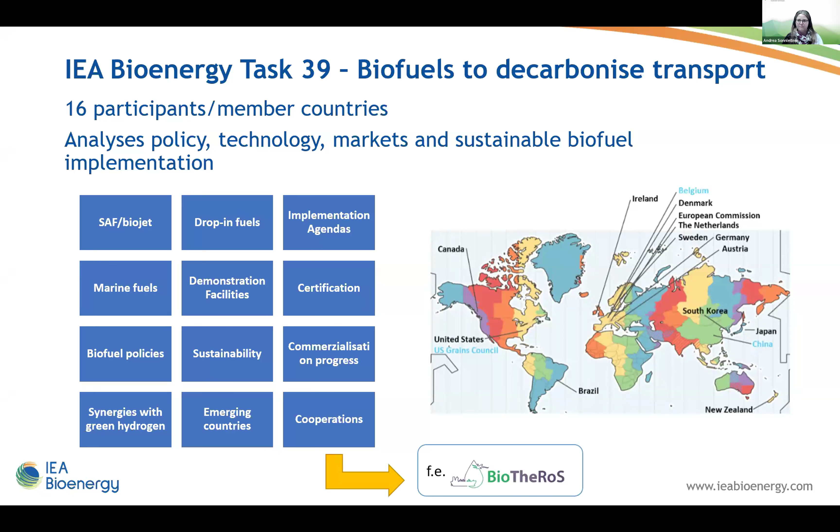At this point, I'd also like to invite you to have a look at the Task 39 webpage, where the recently published reports of the task are available. There are reports on sustainable aviation fuels, on drop-in fuels and co-processing, on biofuels in emerging markets, and also the implementation agendas report on biofuel policies.

So what technologies are we looking at in our task? There are many ways to produce liquid and gaseous biofuels from biomass, either from dedicated crops or from residues and wastes. Here you have a graph from IEA Bioenergy where you can see the different technology pathways and also where they are at in technology readiness.

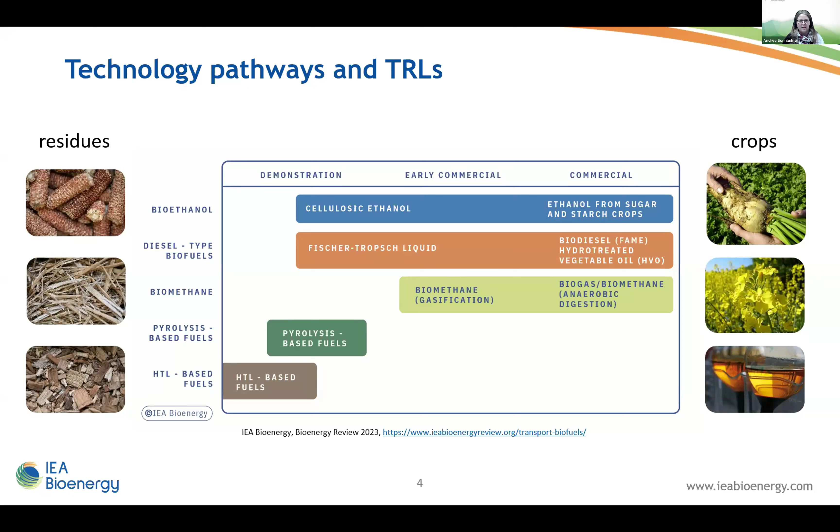So commercial applications are ethanol from sugar and starch crops, biodiesel and hydrotreated vegetable oil, also biogas and biomethane from anaerobic digestion. Biomethane from gasification is already in an early commercial phase. Then we have some technologies which are in the demonstration phase, like cellulosic ethanol production, Fischer-Tropsch liquids, pyrolysis-based fuels, and hydrothermal liquefaction-based fuels.

We in Task 39 are mainly focusing on advanced biofuels, and there we assess and track the development of advanced biofuels demonstration facilities. So we have this database on facilities for the production of advanced liquid and gaseous biofuels for transport, and we are tracking this development since 2009.

We have seen a lot of developments in recent years. Within this database and map you have the possibility to search and filter for different facilities and technologies. So we have listed alcohol to jet as a technology, e-fuel biomass hybrids, fast pyrolysis, fermentation, gasification, hydrothermal liquefaction, hydrotreatment, lignin depolymerization, and others.

There is also the possibility to filter on the status of the facility - is it a planned or announced facility, is it already under construction or even operational. And you can also filter by raw materials or the output of the facility.

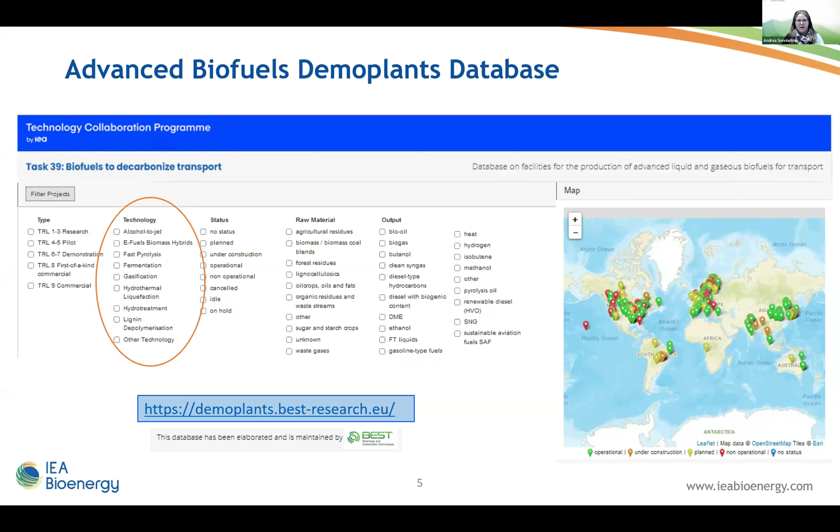From this database and the entries we have there, I want to show you two examples of such demonstration facilities. Those are from thermochemical technology routes, and afterwards Patrick Reumermann will tell you more about the pyrolysis technology, and Theresa Köfler will tell you more about the gasification. One of the examples I brought with me is the Pyrocell plant in Sweden.

This facility uses the BTG-BTL pyrolysis technology, and the upgrading is then done in an existing refinery. The other example is the syngas platform in Vienna, which is a biomass gasification plant with Fischer-Tropsch synthesis. But as I said, my colleagues will tell you more afterwards.

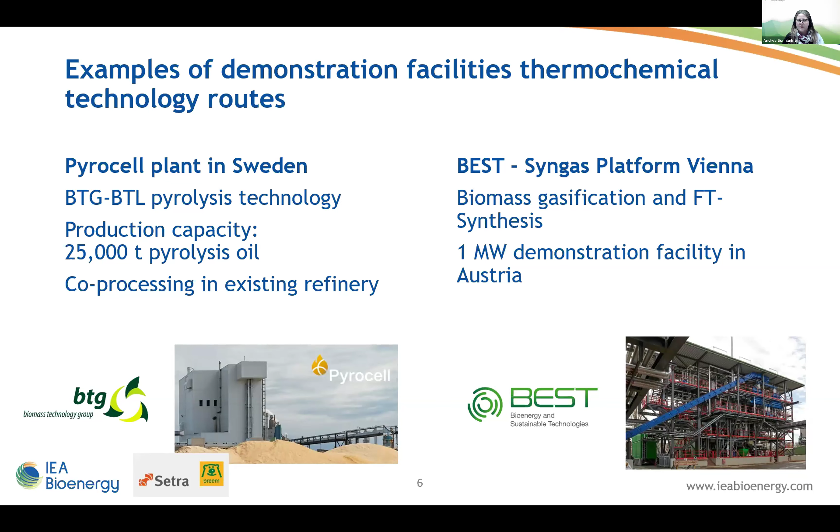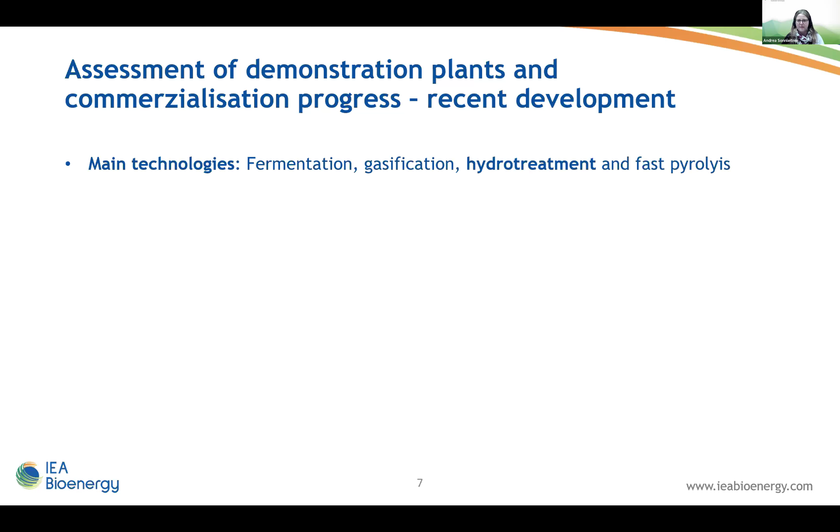Now I want to give you some insights on recent developments we have seen within assessing the demonstration plants and the commercialization progress. So the main technologies listed in our database are fermentation, gasification, hydrotreatment, and fast pyrolysis, whereas the hydrotreatment is already commercially available. We've seen in the last years a rising number of facilities and also a rising number of planned facilities.

There were many announcements in recent years, also for the production of sustainable aviation fuels. Then we also see a diversification of technologies and the combination of different technologies - as I said before, we have some listed which are e-fuel biomass hybrid systems. There are also more and more co-processing facilities, and we see an increase in retrofitting oil refineries.

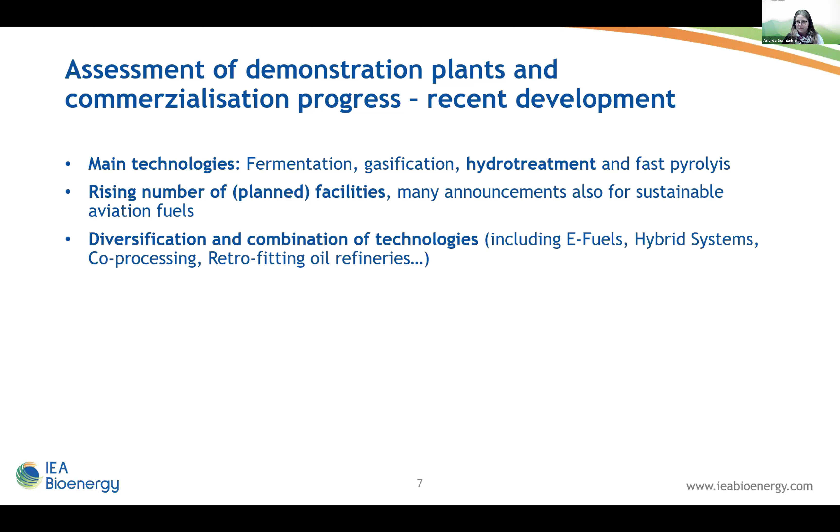We saw also that more and more waste streams are used, and also waste streams from non-biological origin, or recycled carbon fuels, like for example flue gases as feedstock for fermentation. And with our global view, we also saw the increasing development in emerging countries and in Asia.

But what we also see is that commercialization takes time. There is slow progress for some technologies and also many setbacks in the commercialization process. So there are cancelled projects or announcements which are not leading to facilities.

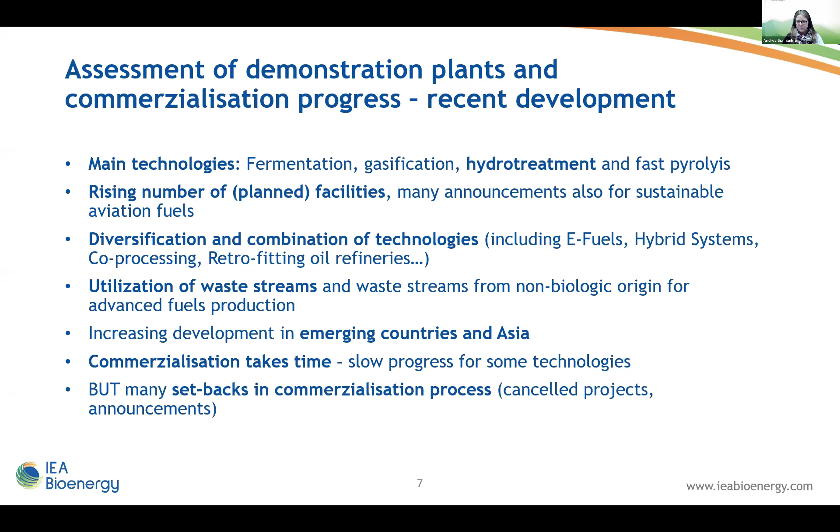As I said, there is now a focus on sustainable aviation fuels production. So there are many plants with SAF capacity or planned SAF capacity, and many announcements for facilities producing sustainable aviation fuels.

And in the existing facilities, the SAF fraction can be increased. So at the moment, the main technology is the hydrotreatment technology, and there SAF is only one of the possible products. The fraction which is produced the most is depending on economics and policies. But there is potential that in those facilities, the SAF fraction can be increased.

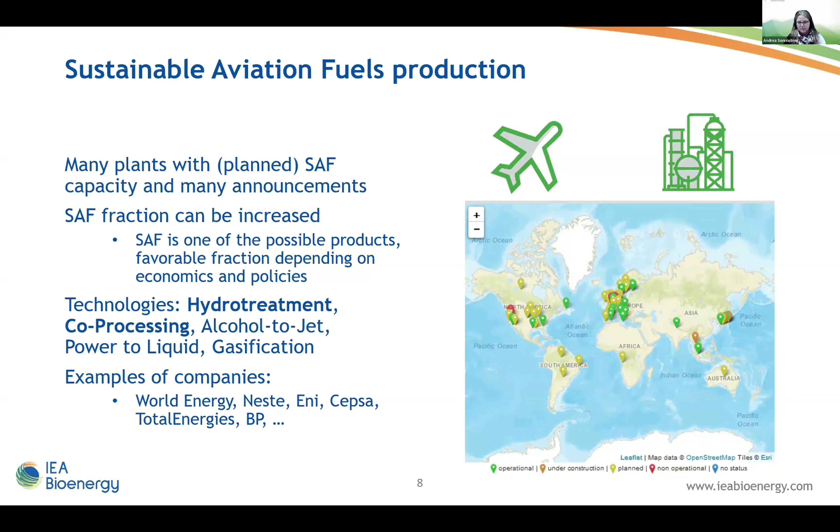But why is it so important to demonstrate technologies and to scale up the facilities? The demonstration validates the feasibility and efficiency. Within real world settings, the effectiveness can be confirmed, and crucial performance data can be provided.

It's also important to have a variety of feedstock, so the demonstration of different technologies is important, to use different feedstocks and waste streams, and to see in real world settings how the feedstock supply chain can work. The scale up reduces production costs through economies of scale.

We see that reaching commercialization is critical, but it takes time from the announcement of a plant facility up to operation. And there is the risk of scaling up too fast, which can lead to failures and setbacks for the technology.

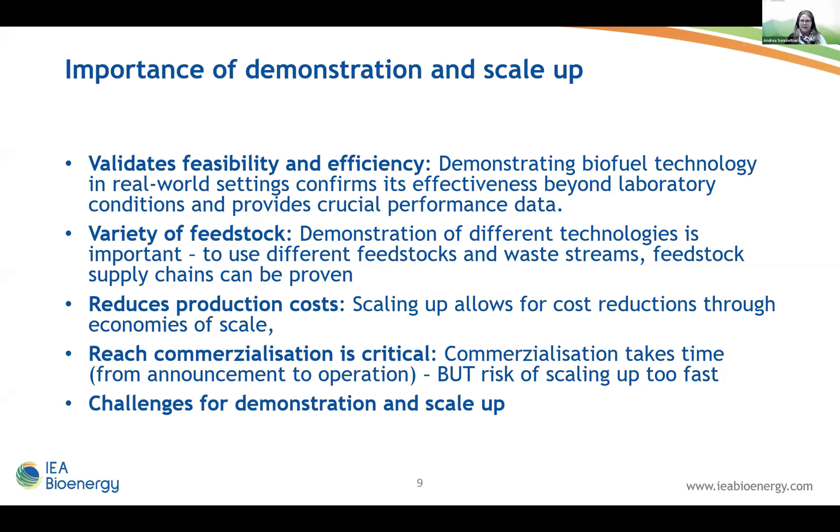There are also challenges for demonstration and scale up, which I'll give you on the next slide. Here are listed implementation barriers for the production of advanced biofuels: economic implementation barriers, like the high production costs of advanced biofuels, the financial risks of demonstration, and first of its kind facilities. Then we have uncertainty of regulatory framework and policies.

Another important barrier is the availability of feedstock and the sustainability of feedstock. In some countries, policy is focusing on options other than liquid biofuels.

But we also see a lot of opportunities for liquid biofuels. The technologies are based on a broad variety of biomass feedstocks, which leads to diversification of energy supply. Biomass production provides regional income, and we can use biofuels in current vehicles and existing infrastructure, so we have immediate greenhouse gas emission reductions.

The high energy density of liquid biofuels is an important alternative solution for the hard to electrify sectors in transport. So instead of using liquid biofuels in passenger cars, it's a good opportunity for trucks, ships, and planes.

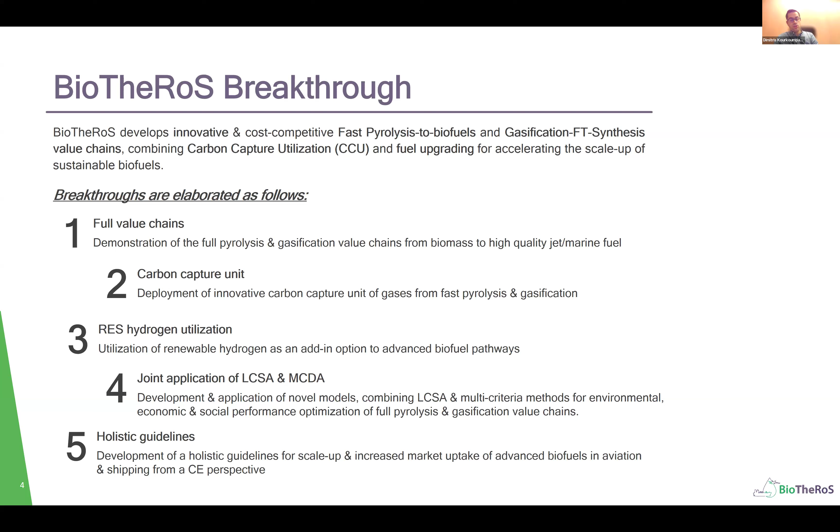Please let me describe in brief, since my colleagues later, Patrick from BTG and Teresa from BEST, will describe in more detail their facilities that are involved in BioTheRoS Project. So just a brief description here.

BTG operates a lab, a pyrolysis bench scale unit with capacity from 2 to 5 kilos per hour, and a larger scale pilot plant from 80 to 200 kilos per hour.

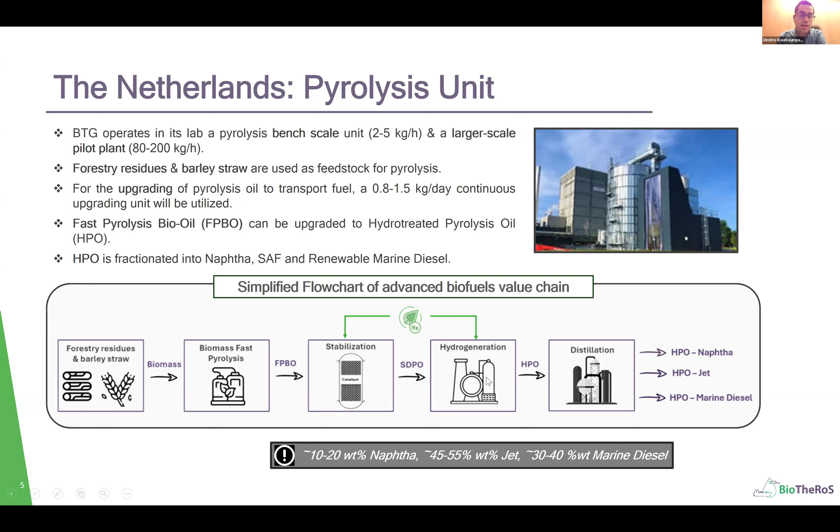In BioTheRoS Project, we will investigate through this pathway two feedstocks: forestry residues and barley straw. So as you can see in the figure, starting from this biomass and through fast pyrolysis, we produce fast pyrolysis bio-oil, and then by upgrading through hydrogenation, we produce HPO that is fractionated into naphtha, SAF, and renewable marine diesel. This is the first pathway.

The second pathway is under the supervision of BEST colleagues. Here BEST operates a plant about 1 megawatt scale, a reactor with capacity 200 kilos per hour, and a 250 kilowatt pilot Fischer Tropsch synthesis unit.

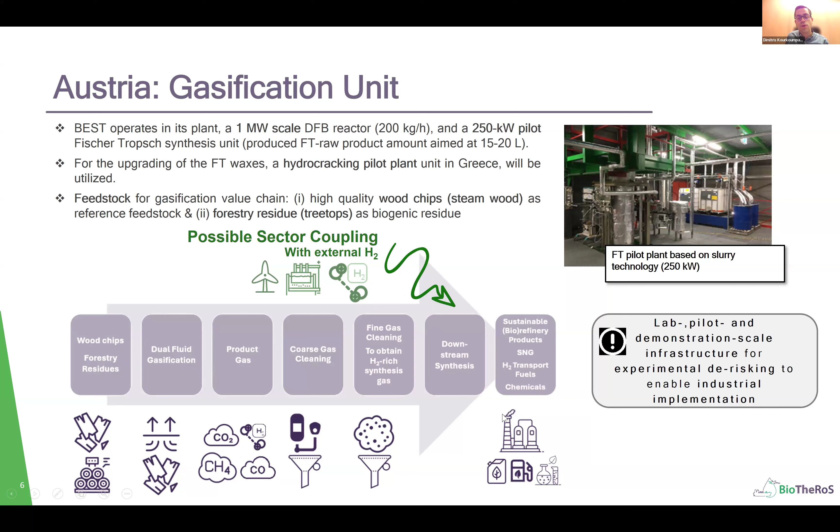Now our methodology, which are the activities, how we address these technologies and what we do in BioTheRoS Project. First of all, we investigate the biomass supply, the biomass potential, the whole logistics about the treatment that may be required.

Then we do lab scale activities first, and then pilot scale activities in the facilities that I described before, in order to produce a plethora, a number of final biofuels to be used either in the aviation sector or in the maritime sector.

For these activities, of course, we support and do modeling, for example process modeling, in order to evaluate the scale-up scenarios, so to identify the most critical parameters and to try to optimize one of the scale-up scenarios.

We do, of course, experiments, LCA analysis for the environmental assessment of all these activities, and finally analysis regarding market dynamics and business modeling in order to find opportunities in the market for those fuels. Of course, we are in contact with stakeholders and collaboration with other projects in order to be in line and synchronize our activities.

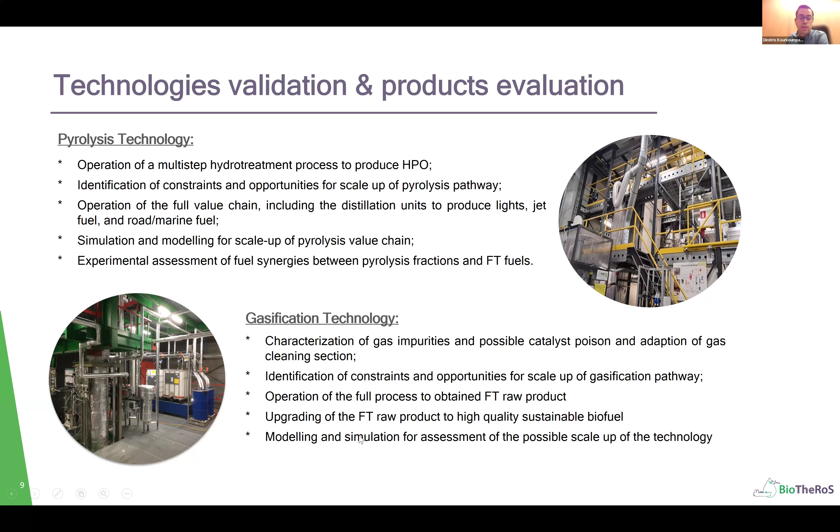To upgrade this into high quality sustainable biofuel, and finally modeling simulation of the assessment of the possible scale-up technology.

This one is the framework, the description about the life cycle analysis. So we will develop a specific framework for the whole value chain under life cycle thinking using ISO standards. The same work for the life cycle costing, the life cycle thinking in terms of cost, and for the social analysis, the same in the social dimension.

So we'll combine all of these pillars under one using multi-criteria analysis in order to present the most sustainable pathway for the stakeholders. Of course, we will do also techno-economic assessment of CCUs and renewable hydrogen as add-in options to advance biofuel pathways.

The impacts regarding the BioTheRoS project is first of all to optimize the process from biomass to biofuel. So we see which are the points that need to be improved in these value chains in order to go for the scale up.

Of course, based on the work that we are going to do, we build knowledge for upscaling, the biofuels efficiency enhancement, so to overcome technical bottlenecks, and of course integration of CCU and renewable hydrogen will improve the efficiency of those technologies.

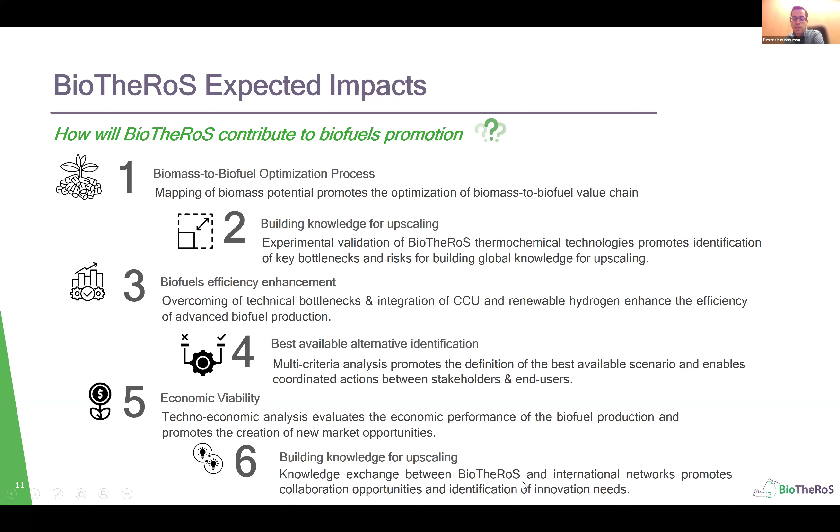The economic viability is another impact that we are also going to have at the end of this project, so to provide a techno-economic analysis in order to evaluate the economic performance of those technologies. And of course, as I mentioned in the beginning, not only with technology providers and other partners that are working on that, but also with international networks and other projects.

Synergies that we have are, of course, with government and regulatory bodies and research stakeholders in order to provide this guideline that we are going to develop, as well as with fuel producers and suppliers, airlines and shipping companies. So as you can see, we are looking for synergies with all stakeholders in the whole value chain.

And of course, very critical is also the biomass providers, because biomass potential is the first aspect that we investigate and have to take into consideration. And of course, the social acceptance of our work is always an issue, and we like also to have synergies and to provide our own contribution to the citizen.

Some take-home messages. First of all, the sustainable supply of quality, cost-effective feedstocks to future biorefineries is fundamental to growing the bioenergy industry. Managing biomass supply chain risk is a critical part to favor long-term sustainability of advanced biofuels in terms of adequate fuel supply.

The deployment of a holistic, circular economy driven guideline for the full supply chain of advanced biofuels is needed, both for aviation and maritime markets. So constraints and opportunities for scale up will be highlighted and will be provided through the project.

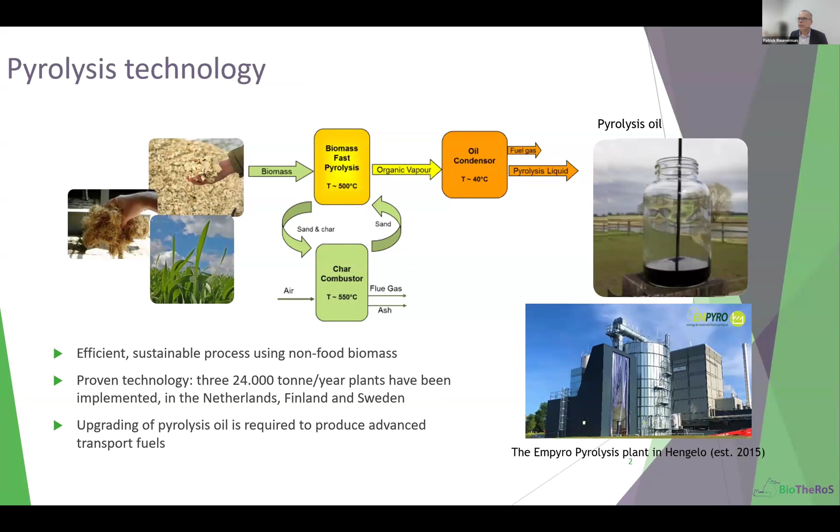To use it as an advanced transport fuel, you have to upgrade it. This upgrading, the value chain which we see for that, is that we have decentralized fast pyrolysis plants, which are located close to the biomass. This is because transporting biomass is expensive, since it is bulky, and sometimes the moisture content is also a bit higher, which means you are transporting a big part of water and air.

So close to the biomass, we have one or more pyrolysis plants. They take in around 40,000 tons dry biomass on a dry basis. Several of those feed into a centralized upgrading unit. This upgrading unit takes in the pyrolysis oil, which we term fast pyrolysis bio-oil, or FPBO, and then we upgrade it towards HPO, hydro-treated pyrolysis oil. We expect that the minimum size for this centralized upgrading would be around 3 pyrolysis plants, so 70,000 tons per year as input. The typical size would be about 10 pyrolysis plants, so 240,000 tons per year of pyrolysis oil.

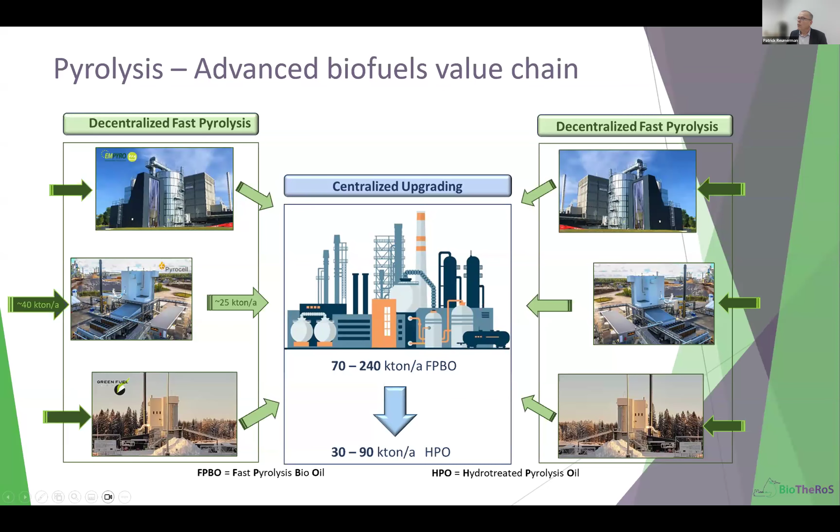Good, well then, now we have the second technology, the upgrading. To give an idea about what the issue is, what the challenge is, we have here a comparison of the fast pyrolysis bio-oil to the left and the drop-in biofuels to the right.

If you look at the picture, you already see it. The pyrolysis oil is opaque, and its viscosity is a bit higher than, for example, the aviation fuel, which is nicely transparent and low viscosity, and the distillate marine fuel, which is also low viscosity and transparent.

The difference becomes even more apparent when you look at the properties. Fast pyrolysis bio-oil can be described as a liquid biomass, and there is still water in it - 1/5 to 1/4 of the mass is water. In drop-in biofuels, we have hardly any water. The density is 1.2 kilogram per liter, that's below 1 for the aviation fuel and for the marine fuel.

A big difference is the heating value. This is 16 megajoule per kilogram for the fast pyrolysis bio-oil, which is comparable to biomass, and it's about 42, 43 megajoule per kilogram for these drop-in biofuels.

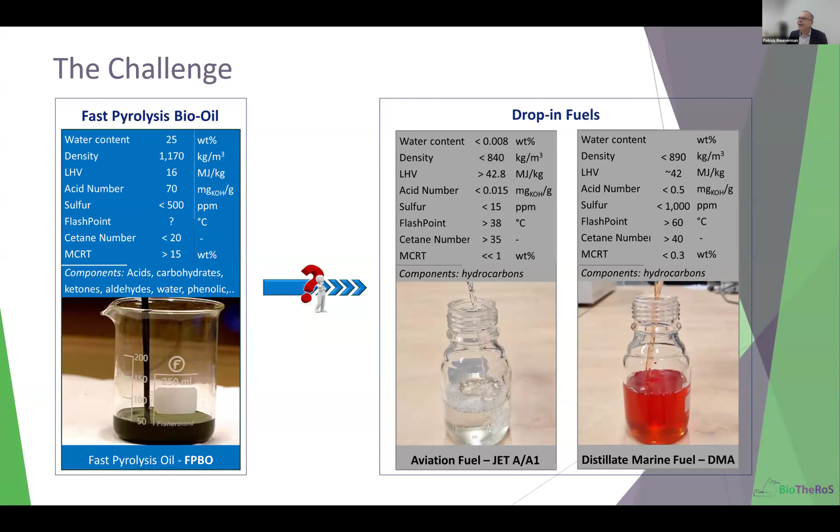Well, how do we change that? Because we have to if we want to make advanced biofuels. We upgrade this biofuel in 2 steps. First, we stabilize the fast pyrolysis oil.

We do that with a dedicated Picula catalyst, a proprietary catalyst. We use quite high pressures for these types of processes, reasonably medium temperature ranges, and we can stabilize this oil so that it becomes less reactive, and we get a new product, stabilized pyrolysis oil. This is a liquid which is far more similar to petrochemical products, so it can be used, for example, as co-feeding in a fluid catalytic cracker of a refinery, or it can be used to produce chemicals directly.

But we want the transport fuels, so we do a second step. We hydrotreat this SPO. For that we can use a standard catalyst, NiMo, CoMo - nickel molybdenum, cobalt molybdenum. For these types of processes, normal pressures and temperature ranges, and we get our product, the hydrotreated pyrolysis oil. This is kind of a more generic name for a generic transport fuel.

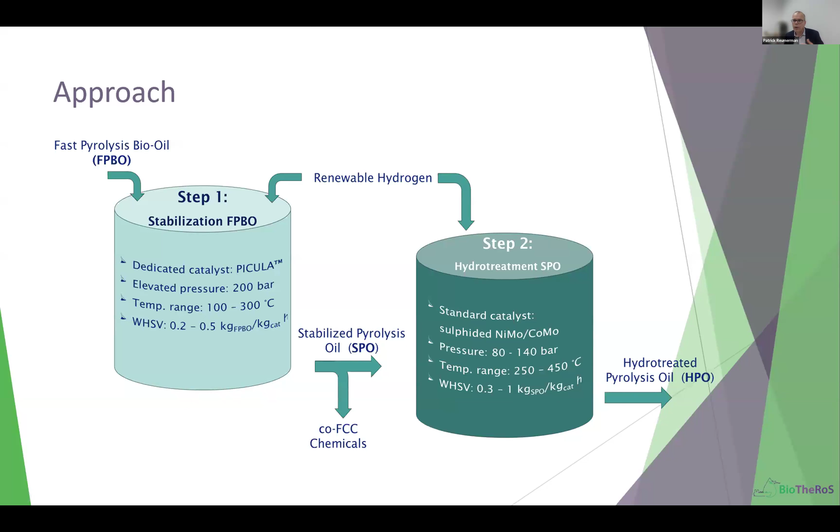If you take this approach and transform that into how a process would look like, we get this picture. This 2-step process is divided into 3 steps. In the first step, and you see this is a fixed bed, we use our Picula catalyst to stabilize the pyrolysis oil. We get as the product the SPO, the stabilized fast pyrolysis oil.

After that, we remove the oxygen in the form of water. We do that with a hydrotreatment catalyst, and we get an intermediate product which is stabilized deoxygenated pyrolysis oil, which then needs to be hydrogenated, so hydrogen needs to be added, so that we get our hydrocarbons, the hydrotreated pyrolysis oil.

This pyrolysis oil can then be distilled via a typical simple distillation process, and we get 3 products. The first, the lights, those are the HPO naphtha fraction, around 10 to 20%. Then in the medium range, C8 to C18, we have the jet fuel range, that's about 45 to 55% of the HPO.

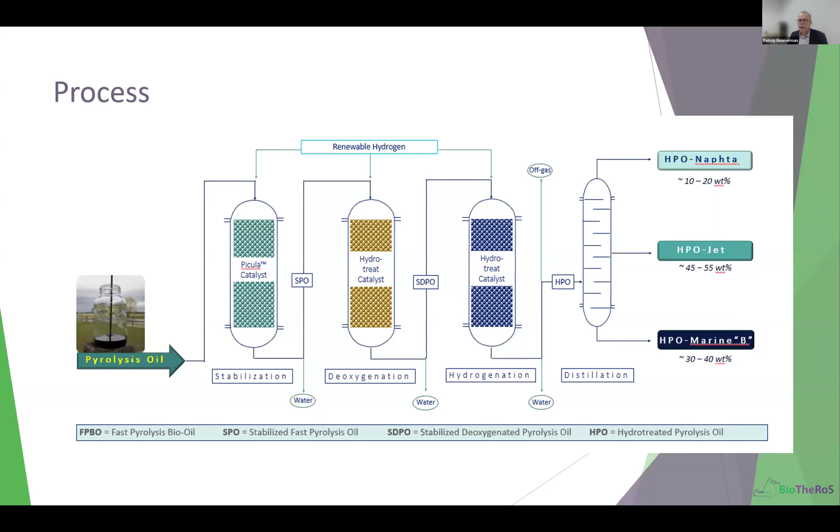Well, how does that look in practice? Actually a bit like you would expect. Here we have some laboratory examples of what we did in our laboratory, in our bench scale and pilot units. We have done this with several types of biomass, with both hardwoods and softwoods.

Here you see on the left the fast pyrolysis bio-oil - it is viscous, it is opaque. The SPO is still opaque, by the way, but it looks a little bit better. And then you see HPO, which can be converted, distilled into naphtha, the biojet, and the biodiesel. Of course, these are fully transparent. This one is a little bit less transparent. This is how it looks.

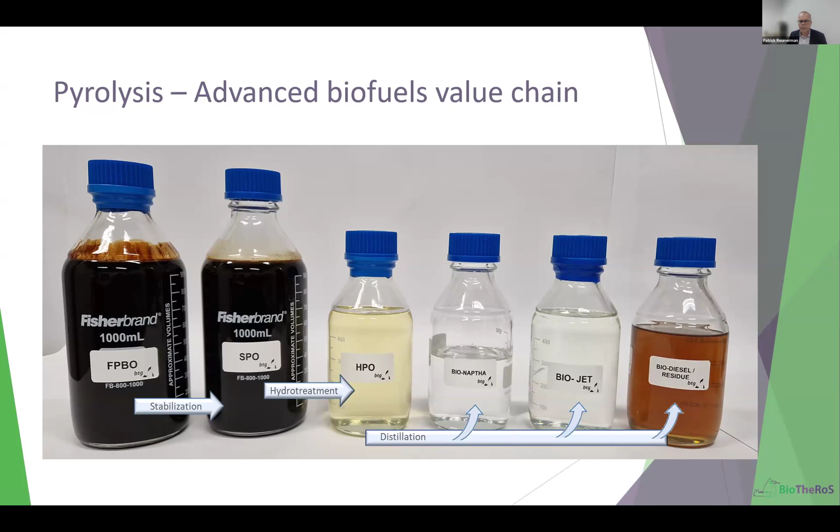Another way to see how it looks is this table. I'll walk you through it. These show the fuel properties of the various intermediate and final products of the upgrading process. We see here the column of the fast pyrolysis bio-oil, and at the end, the column of the hydrotreated pyrolysis oil. What you see is quite encouraging.

Our water content, from about one-fifth to one-quarter of the mass, has decreased to almost nothing. Our density has decreased to around 0.85. Our viscosity has decreased, which is quite nice. And very important, our carbon residue is reduced to almost nothing.

How does that happen? One way to look at it is via the elemental balance. We see that oxygen is reduced from about 50%, which is very typical of normal biomass, to almost nothing. Looking at the ratios, the H/C ratio here is 1.3 to 1.5, and with the HPO it is very near the typical petrochemical range. For the oxygen over carbon ratio, we see it has gone to almost nothing. So this HPO looks quite a bit like these transport fuels.

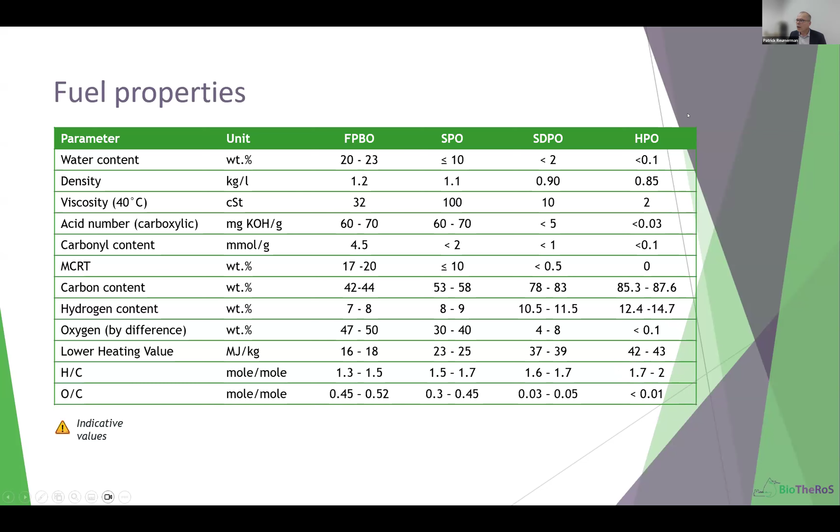There was a question already in the chat about how flexible we are with these products. Well, they are the result of a distillation process, so if you change the temperature range, you are in a sense relatively flexible. In practice you will not be, because especially the HPO jet has quite a strict specification.

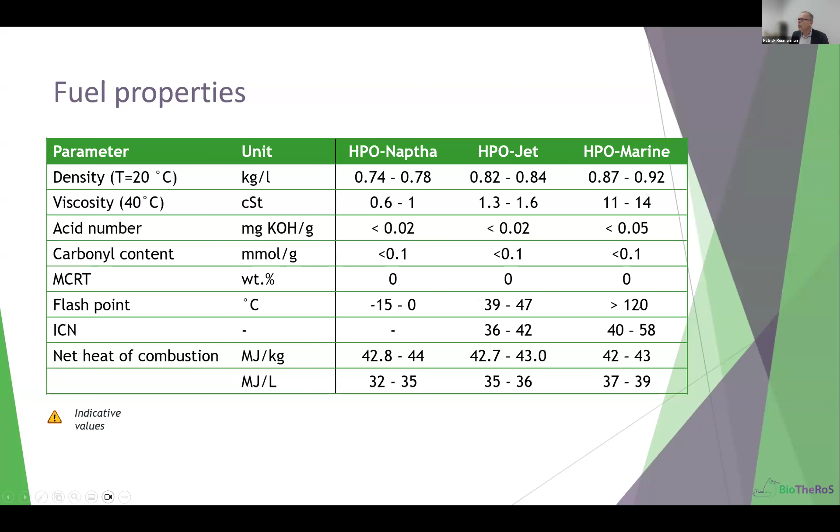So in summary, we can upgrade the fast pyrolysis bio-oil to hydrotreated pyrolysis oil, and we can fractionate that into naphtha, biojet or sustainable aviation fuel, and renewable marine diesel. In the BioTheRoS project, we want to demonstrate the value chain using forestry residues and barley straw, another lignocellulosic feedstock, as the two feedstocks for the pyrolysis upgrading process.

Here you see again the project's three products with their specific fractions when you distill the HPO.

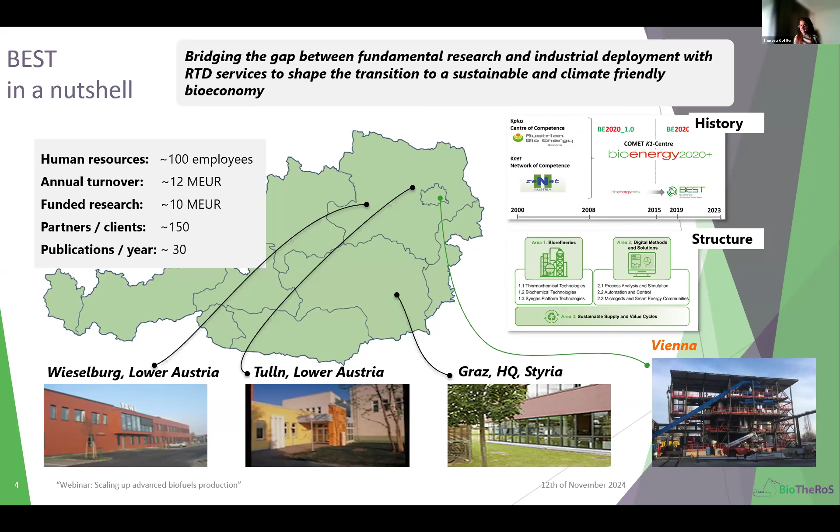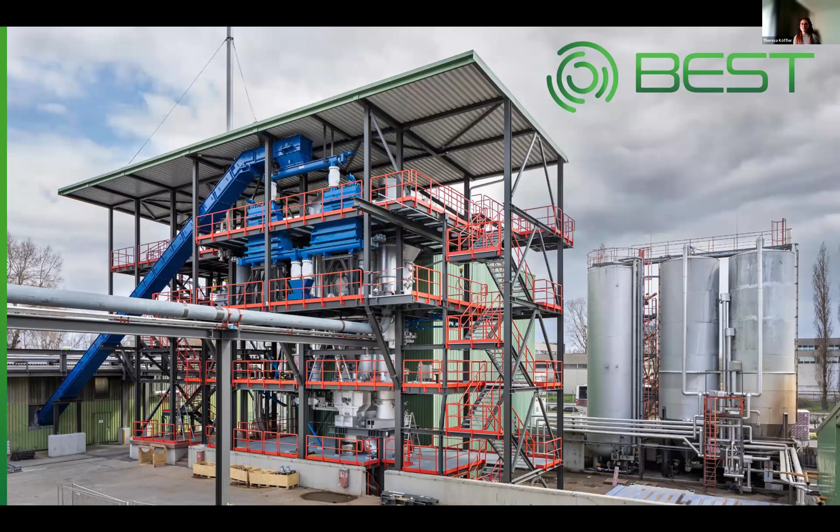Now I would like to show you this picture of our gasification unit. It's a dual fluidized bed gasification unit, and we call this research site Syngas Platform Vienna, where we have the waste-to-value process chain. Here we combine the 1 megawatt DFB, dual fluidized bed gasification plant, and the 250 kilowatt Fischer-Tropsch synthesis demonstration plant.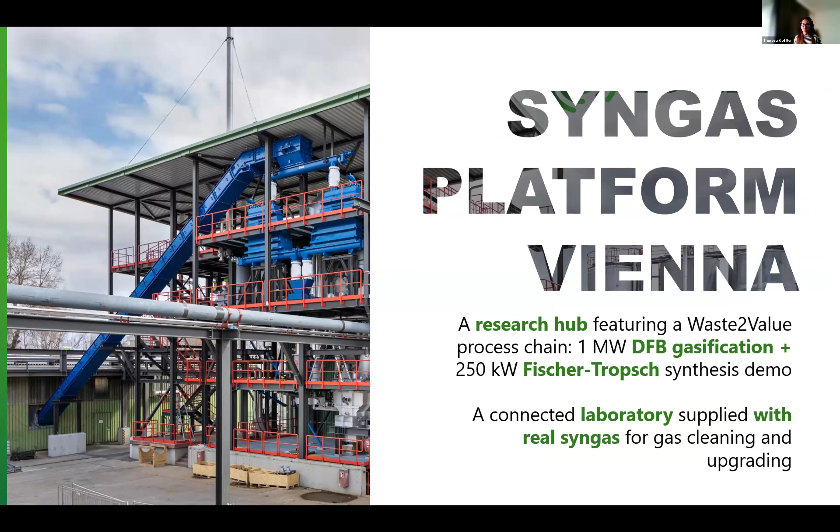Here you can see the picture of our industrial site in Vienna. We are situated at the industrial site of Wien Energie, which is an incineration company. And we have here the DFB gasification demonstration unit.

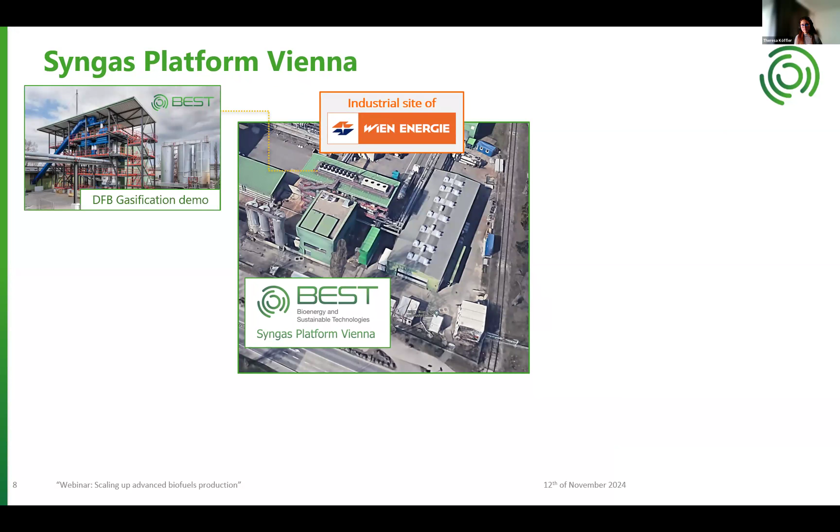Then we have, in the building adjacent to it, in the middle part in this green tall building, the Fischer-Tropsch pilot unit. We also need feedstock containers because for the DFB gasification we need some feedstock, situated in the middle part of this picture. And in order to analyze all our products and gases during operation on site, we also have an analytics lab.

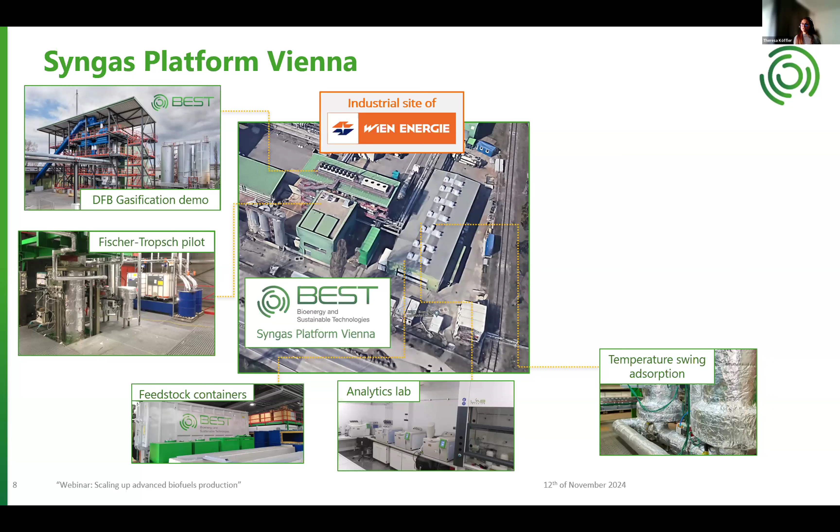Furthermore, we are also investigating different novel technologies to optimize our process. For example, we want to investigate new gas cleaning technologies like the temperature swing adsorption. Therefore, we have small-scale laboratory units where we do different experiments and research. Another one of these small-scale facilities is the aqueous phase reforming unit, as well as a small-scale Fischer-Tropsch laboratory unit.

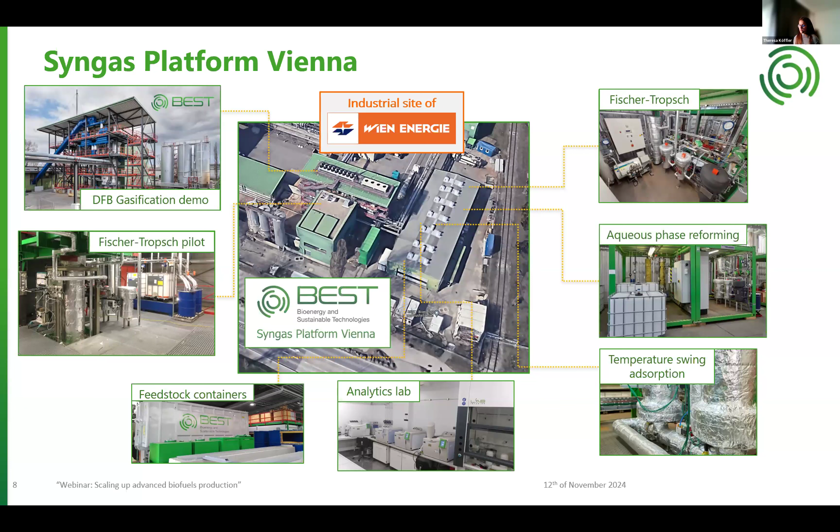Now I would like to give you an overview about our process. So we are starting with the solid feedstock. In our case, these are residues like forestry residues or agricultural residues, but we also have the possibility to use more difficult feedstocks like sewage sludge. Then we feed all these solid feedstocks to our dual fluidized bed gasification unit, and there the solid feedstock is converted to a gaseous product, which mainly consists of carbon monoxide, hydrogen, methane, and carbon dioxide.

To further use this syngas, we need to clean it before we can use it in downstream synthesis. Therefore, a variety of different gas cleaning steps is necessary to get rid of all the impurities and catalyst poisons. Then we apply the synthesis. In our case, we use the Fischer-Tropsch synthesis to produce transportation fuels and base chemicals. It is also possible to couple this process with renewable energy sources that provide, via different processes, additional hydrogen, which we can also use here.

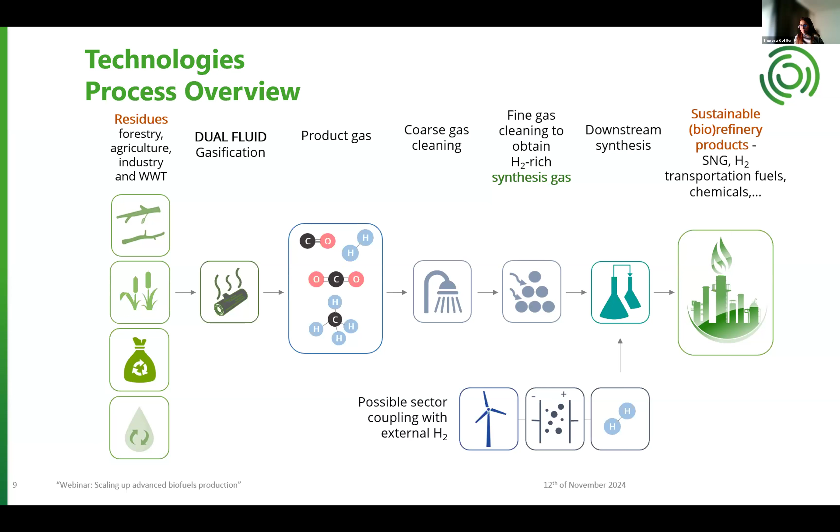Now I would like to get into more detail on our technologies. First of all, I'd like to start off with the dual fluidized bed gasification, which is the first step in our process chain. We have the 1 megawatt demonstration scale plant, which is equipped for long-term campaigns of multiple weeks in continuous operation. The reactor we use, you can see on the right side of my presentation here. It is an advanced dual fluidized bed gasification.

Advanced because we have the second generation of these dual fluidized bed reactors in Vienna, which is based on the 100 kilowatt DFB plant that TU Wien has invented. The typical syngas composition is depicted on the bottom part of this slide: around 40% hydrogen, 24% carbon monoxide, around 20 to 23% carbon dioxide, and around 10 to 13% methane.

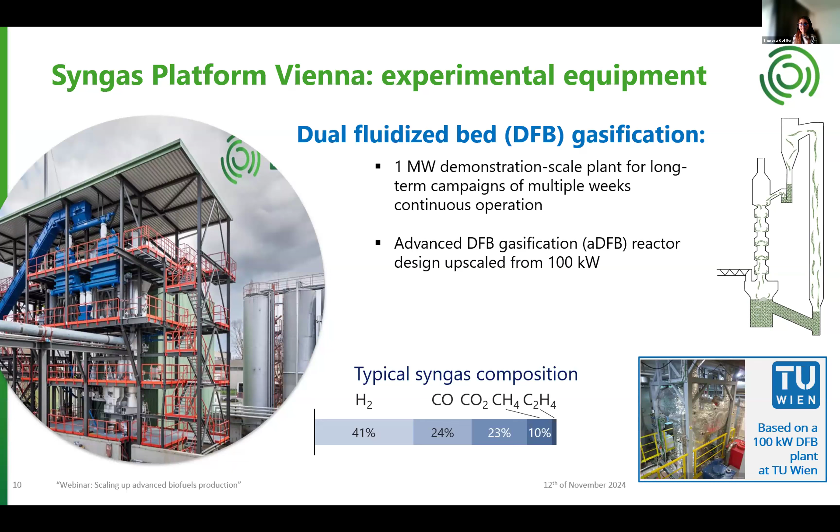Now I'm going to the next step, the synthesis of the now cleaned syngas. This is my research area where I'm doing my PhD at the moment, the Fischer-Tropsch synthesis. We are using a slurry bubble column reactor since it provides enhanced mass and heat transfer properties, because in this reactor, depicted on the right side, which is a funny drawing...

This should show you that we have a three-phase reaction. This yellow background is the wax that we already provide to the reactor, which is also already the product. But to start the process and to operate it, we need this wax already in there, so we call that starter wax. At process conditions, this wax is in a liquid state, and the catalyst particles, in our case a commercial cobalt-based catalyst, is suspended in this liquid.

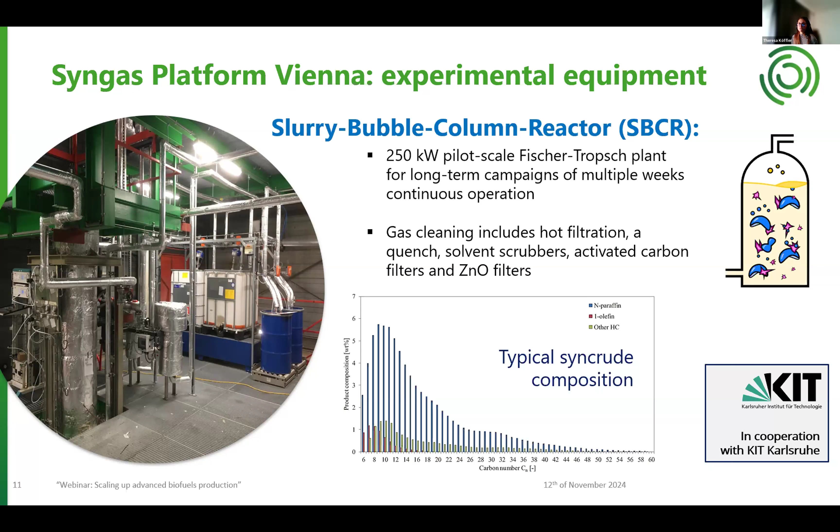Then from the bottom, the syngas enters the reactor and the reaction takes place, producing longer chain hydrocarbons. The typical product composition, or syncrude composition, is depicted in this diagram. Here you can see that different products are being produced: different alkanes, some oxygenates and olefins, and different long chain hydrocarbons can be produced with this process.

Now I'd like to give you some insights into our part in the BioTheRoS project. Our gasification value chain looks like this: we provide the feedstock to the 1 megawatt DFB gasifier, where we gasify the biogenic waste feedstock, or in general, feedstock. After that, we have to clean it in two steps, the coarse gas cleaning and the fine gas cleaning section, where we also look at the gas impurities and develop new gas cleaning strategies to optimize this process step. After that, we want to show that we are able to operate the full process chain, and that we are able to produce the Fischer-Tropsch raw product.

Then we give the Fischer-Tropsch raw product to our project partner CERTH, where they hydro-treat and hydro-crack the raw product to obtain the final sustainable aviation fuels. They also use it for some simulations and modeling of the whole scale-up of the gasification process.

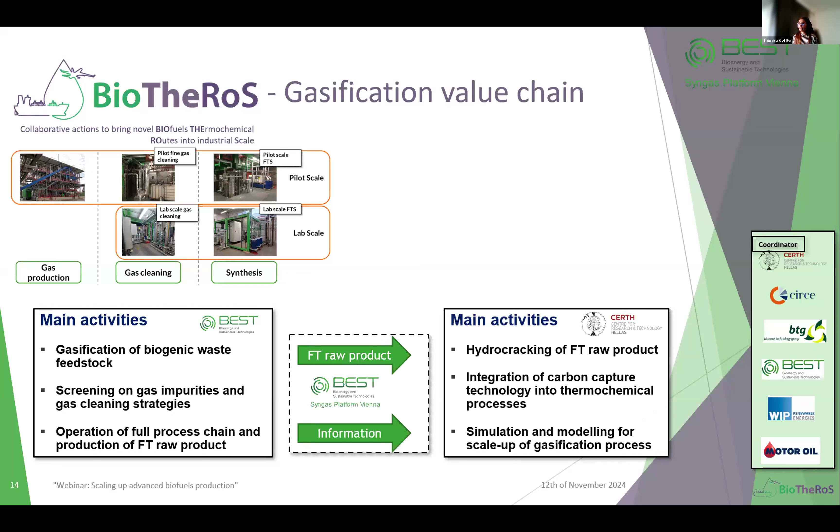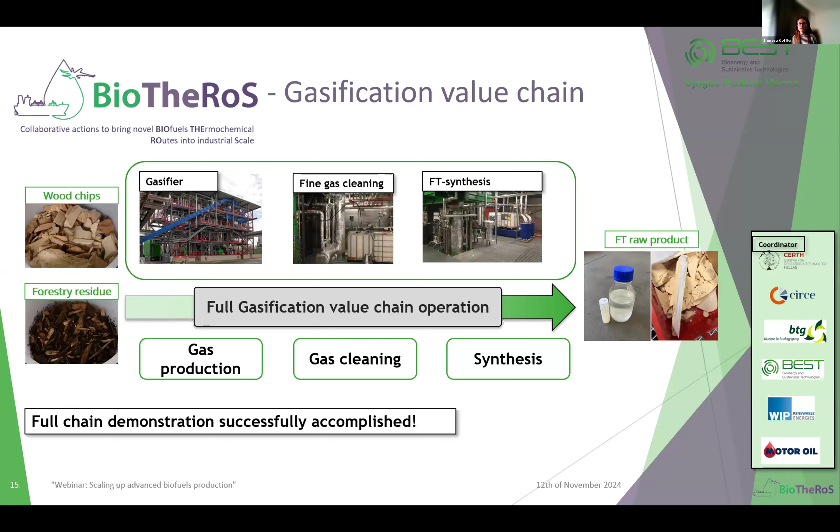So then we give all these feedstocks, we feed them to the gasifier. And after the fine gas cleaning, we were able to produce the Fischer-Tropsch raw product that you can see on the right side of my slide. Here we have the wax fraction, and here we have the liquid Fischer-Tropsch fraction. So we were able to demonstrate the full chain operation of this process.

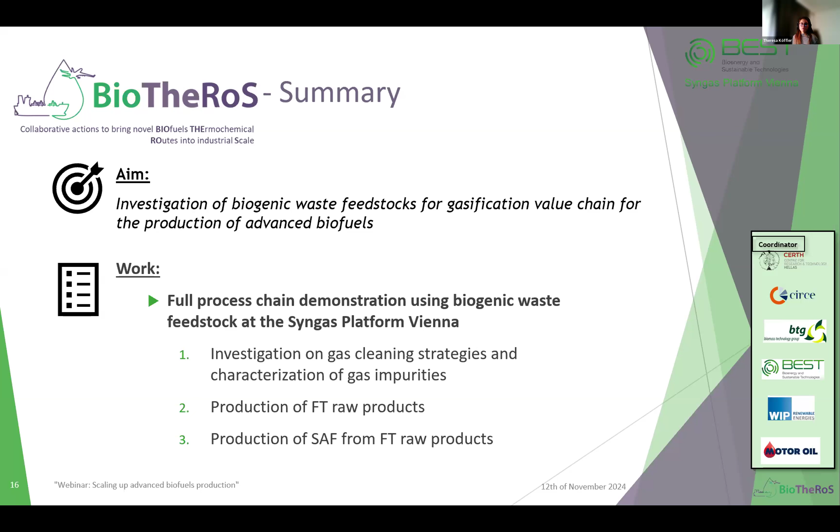To sum it up, our aim is to investigate biogenic waste feedstocks for the gasification value chain to produce advanced biofuels and chemicals. We are working on using different feedstocks for this process, so that we not only use these really nice wood chips, but more difficult feedstocks, which will be important in the future. And we were able to produce the Fischer-Tropsch raw product via the Fischer-Tropsch synthesis.

But still, there are some huge scale-up challenges that we face. For example, if we look at the gasification unit, as I've already mentioned, we use different kinds of feedstocks, so the syngas that we produce out of these different feedstocks varies a lot. It can be quite challenging to use different feedstocks in one single gasification unit.

Then we have applied the countercurrent column in the gasification reactor part, and this application enables us to have higher tar conversions, which results in a cleaner syngas. But these countercurrent columns are quite complex in engineering, so that's a scale-up challenge that we face there.

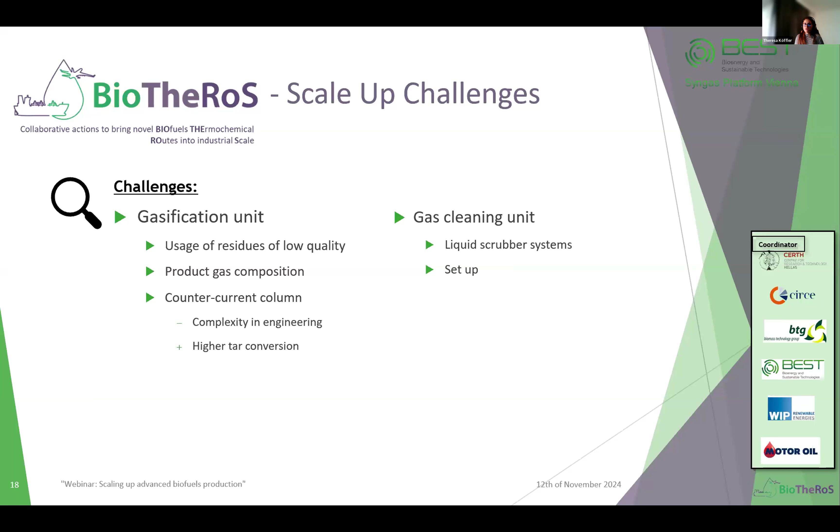Our gas cleaning unit has a lot of different reactor types and different scrubber units, and they have a huge impact on the overall cost of the process, so we are looking to develop novel technologies to clean gas. If we look at the synthesis part, it is a little bit challenging to scale up the slurry reactor for biogenic syngas production routes. But it is possible, we have seen it, and we are looking into how to do it for biogenic feedstocks. And if we want to achieve higher conversions, the tail gas recycling also has huge potential.

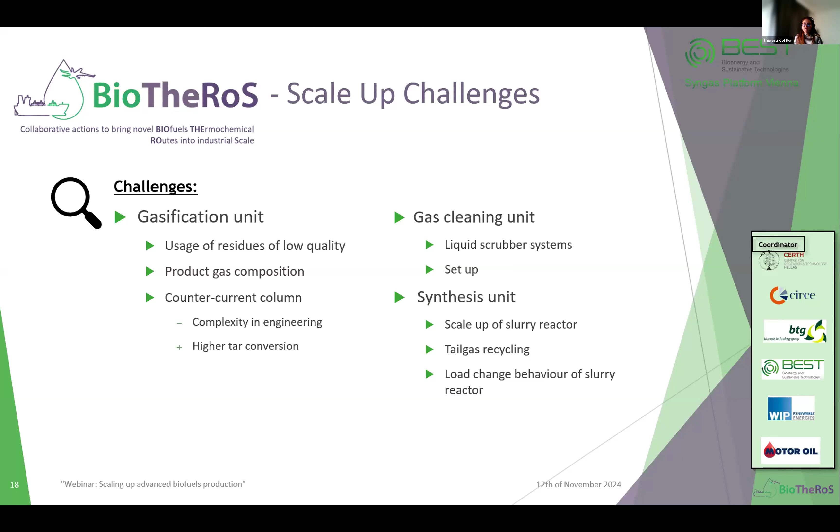These are the main challenges that we are now facing. At the end, I would like to invite you to the expert workshop that we are going to have at our syngas platform in Vienna in mid March 2025. There you will probably see our industrial gasification plant, and also our Fischer-Tropsch synthesis plant. This would be a really nice opportunity to have a more in-depth experience and knowledge about our processes.